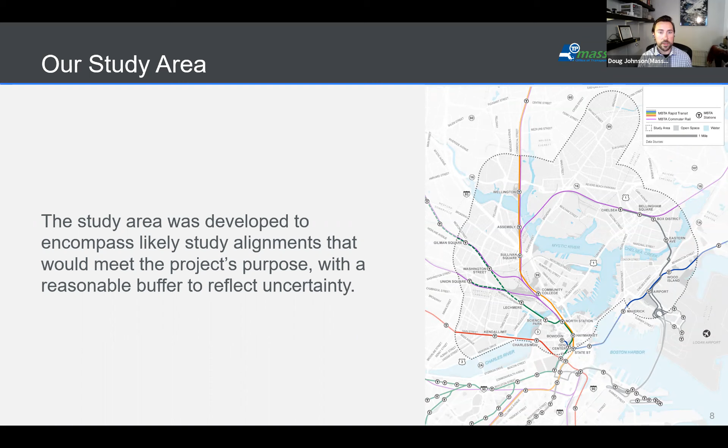Right now, we are developing our tier 2 alternatives. The goal is to finalize those by the end of September, beginning of October, and then take the next couple months to complete the analysis of those alternatives. The goal is to have the alternatives analysis complete by the end of this calendar year or beginning of next. Then we plan to have another stakeholder working group meeting sometime in winter 2022, followed by a third public meeting, and ideally the selection of a preferred alternative.

Between now and the end of December, we are going to meet with all of our municipal stakeholders several times. We've been meeting with many of you over the past couple months since our last stakeholder working group meeting, and those conversations will continue. In fact, we're meeting with some of you in the next couple weeks before the public meeting on the 28th. So there will be many individual meetings with municipalities as we refine and work out the details of these alternatives.

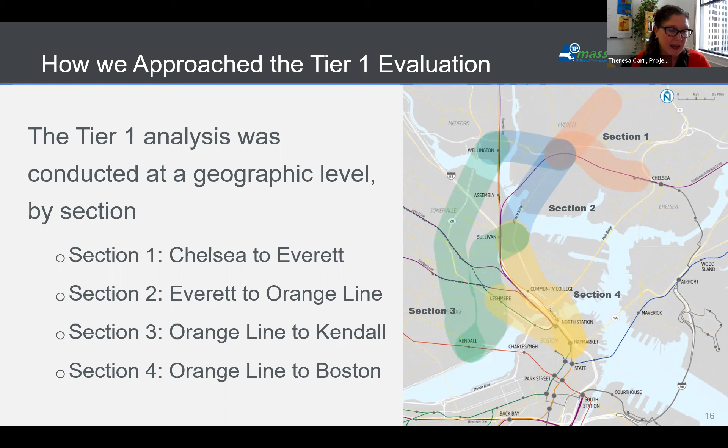So it is a lot of information. We've built in several minutes for discussion at the end of this part of the presentation.

So first, starting with section 1, which starts at Chelsea Station and largely ends at Sweetser Circle with one exception. We explored 7 different concepts. Many of these explore the commuter rail right of way. We have some that are routing onto Route 16, others along 2nd Street to serve Everett Square, and one concept, as Doug referenced earlier, that originates at Glendale Square and operates along Upper Broadway.

Now, concept 1D stands out in how it operates on street to the extent possible, so it gets a lot of visibility for that reason. You're on street as opposed to the commuter rail, which is kind of in back of some of the land uses that we're hoping to attract ridership from. But also, it serves Everett Square. Now, that was something that we really found as being important from this tier 1 analysis—that serving Everett Square is a really important thing to do.

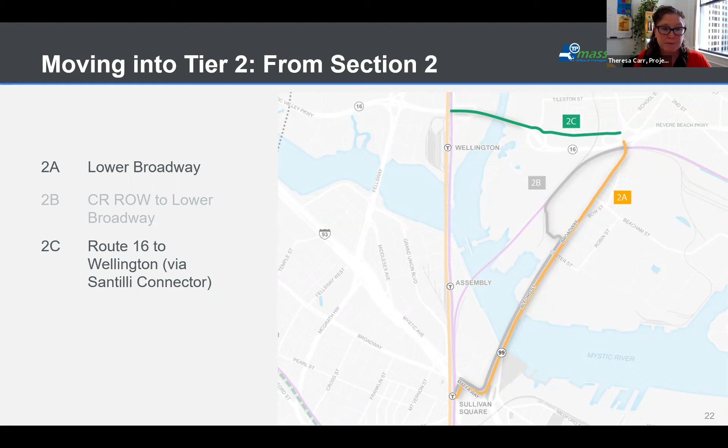So moving into section 3. Section 3, we looked at a bunch of concepts. The main corridors were Inner Belt Road, Fellsway, McGrath, along Washington to McGrath, along Rutherford Avenue over the Gilmore Bridge, all using some variation of First Street or Land Boulevard to Binney into Kendall.

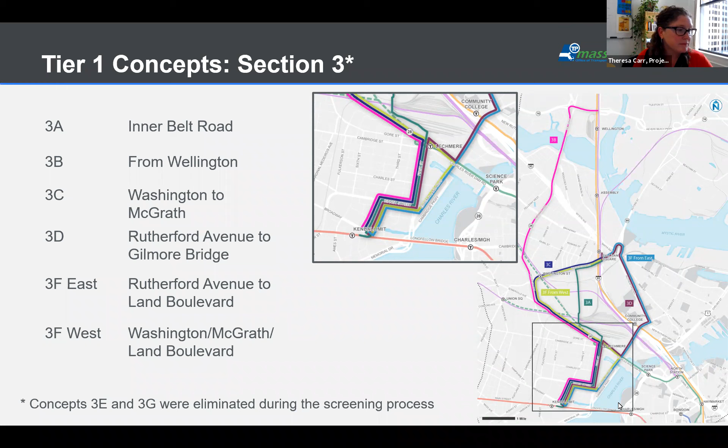Thanks, Theresa. Our consultant team looked at the bridge that had been proposed back in 2013 or earlier for Inner Belt Road, from Inner Belt Road into North Point in Cambridge. And they found that that bridge had a conflict with the yard lead ramp from the Green Line extension.

Right now, what you see there is existing. You can see that there's a small conflict, but the bridge that had been previously proposed, if it were to be built at that elevation, would preclude the possibility of that future connection into the Green Line maintenance facility.

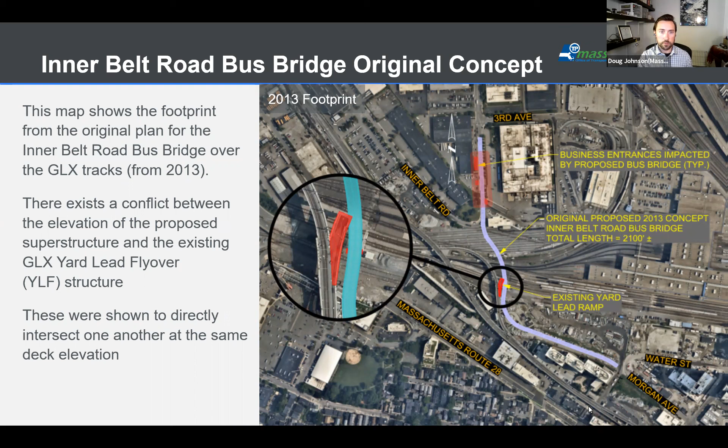So our project team looked at what it would take to elevate that bridge so as not to preclude that connection in the future. Our structural engineering subconsultants took a look at this, created a model of this bridge, and they found that you could build this bridge high enough to clear that ramp and not have a conflict with the existing spur or a future ramp.

However, by raising that bridge that high, you have to make the structure longer. You kick out the approaches, namely to the north along Inner Belt Road. So with the bridge that had been previously proposed, there were going to be some impacts on Inner Belt Road to the right-of-way and the businesses along that stretch.

But with this bridge, those conflicts would be extended further up Inner Belt Road past 3rd Ave.

So technically, while you would be able to overcome these issues, due to the anticipated effort needed to do so, as well as the other anticipated impacts associated with building the bridge, plus the presence of a less impactful alternative route, namely Washington Street to McGrath, the team has decided not to move this alignment forward for further consideration in this study.

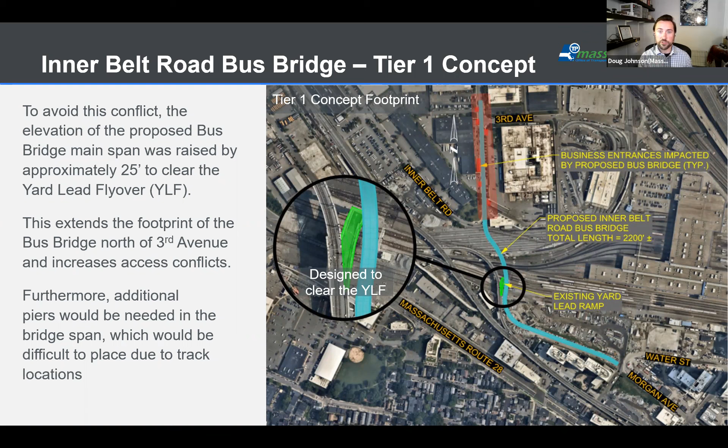But because of the potential conflicts and effort that we believe it would take to overcome those conflicts and those issues, we've decided not to advance this into tier 2. Back to you, Theresa.

Concept 3C, which operates along Washington to McGrath, we feel shows a lot of promise. Operating between Wellington to Kendall along Route 28 is something we'd like to explore a little bit more. We've also had a couple of conversations with the city of Cambridge.

We just, in the technical team, have some uncertainty about what right of way we can assume is available for transit priority. So we are keeping both an alignment that would go down First Street and an alignment that would go down Land Boulevard on the table for a little while longer.

Similarly, between 3B and 3C, they share an alignment south of where Washington Street meets McGrath. So the difference between these two is really Route 28 north of Washington Street. In tier 2, we're really going to be exploring the impacts and benefits of those differences.

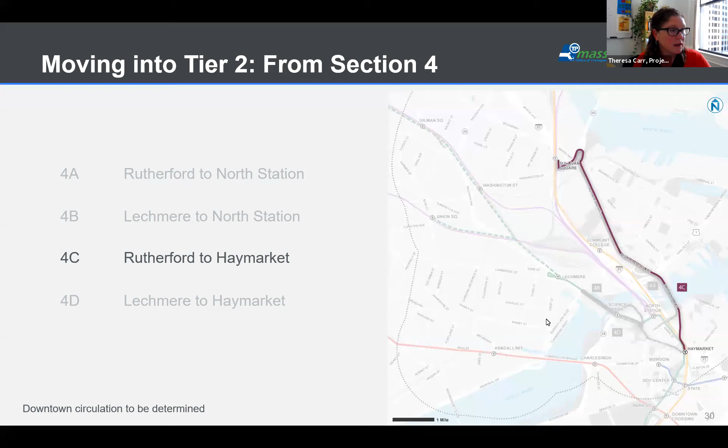And here we'd really like to start having a discussion. We have a few minutes set aside for discussion. These findings are still draft. Doug mentioned we are preparing some documentation about methodology, data, and findings, and we'd be happy to sit down with anyone interested and go over it in more detail. But we'd love to take a couple minutes to go through with you what we've done so far. Do you think this process missed anything? Are you surprised by your findings? Is there anything you think we should have looked at differently?

And let's start with Jay. Thanks, Theresa. So I have 3 or 4 questions, but I'll start with the most general one, which has to do with the scoring system. And I apologize, I did step out for a minute when you started, so you may have covered this already. But I'm trying to understand, how are we weighting these different

categories, climate resiliency, mobility, access, safety, and so on. And I guess I'd like to see more detail about why a certain alignment scored poorly on one versus another. So if it didn't score well for climate resiliency, why was that? And how do we recognize if it scores poorly in one area, but the solution to that makes the project score poorly in another? It starts to get very complicated.

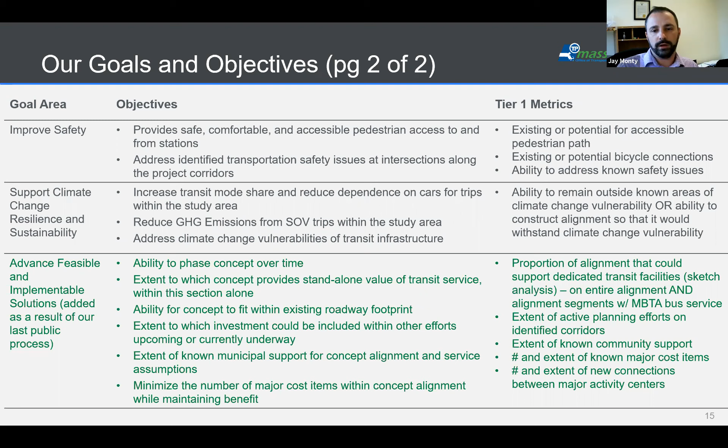That was my first question. Thank you. The next question was in relation to the commuter rail corridor options. I sort of got the sense that there was this desire to not depend on the commuter rail, as if that was an advantage somehow. I wanted to clarify that and understand, is that the case?

Yeah, no, what we found is actually 1D. So commuter rail shows up in sections 1 and section 2. And so in section 1D, we actually saw it showing the most promise. This does rely on a section of the commuter rail right of way between the current terminus and 2nd Street. We just wanted to give ourselves the option, if we move this process forward, in case we found something in conceptual design that would make it difficult.

We know that this is a constrained area, so we wanted the ability to look at a different alternative. But no, I mean, you can look at 1B and 1D, they perform similar, but we really liked a lot about 1D. And that was a little bit different in section 2, just because, as I mentioned, staying on street attracts a lot of visibility.

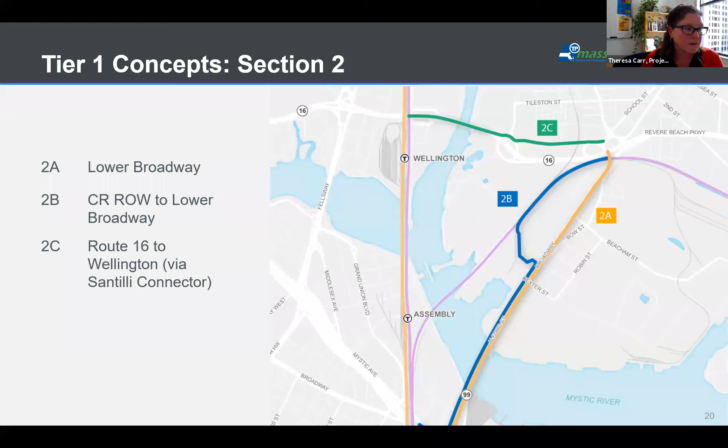We think there would be a lot of benefits from staying on street in this section. We also had some implementation concerns just in how you bring the concept back onto Lower Broadway from the commuter rail right of way. So that actually had an effect on 2B's performance.

Yeah, and I see Suzanne made a comment, I think it speaks to this a little bit too, which is, when we say an implementable solution, does that mean technical feasibility? I think you get to this issue of, when something looks hard, do we avoid it? And I think the answer for us is no, we don't necessarily avoid it if it serves mobility and access and equity. That's an important point I want to make on behalf of Everett, that just because it's difficult doesn't mean it's not worth it.

And so I hope we're not looking at something like the commuter rail right of way in that section between 2nd and 3rd Street and saying, it's hard, so we'll just not do it. I think we need to take a harder look and say, is it what produces the better mobility and equity result?

Agreed. And I think when we get into the next part of the presentation, we will go through a couple of our design assumptions in that specific section as well. Great. Yeah, and if I could just jump in here, Theresa, could you go back to the slide that shows all of the alignments for section 1?

So we found in our evaluation for these, I just want to clarify it because I think the existence of 1B coming out of the tier 1 evaluation may give a false impression. 1B is there as we continue to evaluate the commuter rail right of way, just in case we run into an obstacle or condition that precludes the extension of a busway along the commuter rail right of way.

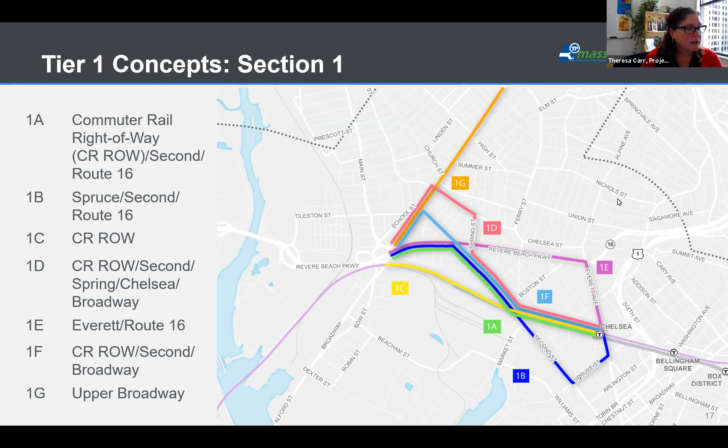Can you just switch to that slide real quick? Sorry, the tier 2. Let me fast forward to it. We're going to show it again, we're going to go through it in a lot more detail. Here we go, well, here's one that shows it.

So we have one going into downtown, sorry, one into downtown, and I guess two going into Kendall. But I guess before we go into the tier 2 piece, can we go to Vineet?

You're on mute. It's like maybe your microphone isn't working. It's showing you're unmuted, but it's not showing a connection. Maybe we could go over to Ali and then back to Vineet.

Sure, Vineet, you can also type your question into the chat box if you'd like. So, Ali.

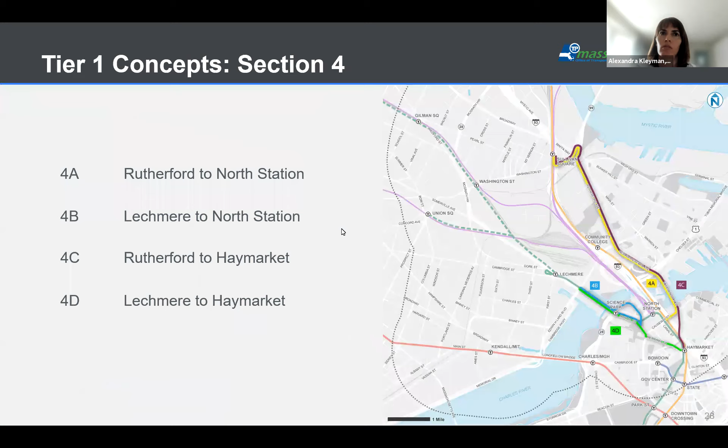So maybe I missed this, but are ridership projections more part of tier 2, the tier 2 analysis, or? That's a really good question. So we looked at the market in tier 1, and actual ridership projections are part of tier 2. That's an example of where when we get down to a smaller set of alternatives, we can do more detailed analysis, and ridership is a perfect example.

So these are all proxies for ridership, right? We're looking at employment, we're looking at total trips, transfer opportunities, the work that Bus Network Redesign has done in terms of high priority corridors, and the number of affordable housing units within a half mile of the alignment itself. So those are all proxies, but we didn't do specific ridership projections for tier 1.

CTPS will be doing ridership modeling for us for tier 2 once we've developed service models for any of the alternatives and estimated run times, things like that. Once we provide that information to CTPS, they'll be able to model ridership.

Great. Try Vineet again. Hi, can you hear me now?

Yes. Very quickly, I just wanted to support the great comments that Suzanne and Jay made, relative to first, we really need to know how the evaluation was done. Doug, you said you'll share the more detailed document, but it does kind of get abstracted too quickly without really understanding the pros and cons. And second, I think Jay said this, is there some sense of prioritization or weighting of the different alternatives? And maybe you answered that, if you did, that's fine, but we'll have to look at that as well.

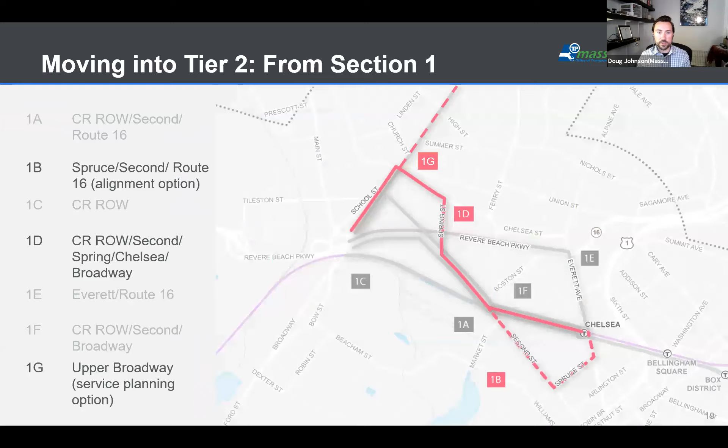Yes, and to your point about it being a little too abstract, I totally understand where you're coming from, and same for Suzanne and for Jay. So we'll provide the documentation for how we did all of this. And I guess it sounds like there's a lot of interest in meeting to discuss how we actually scored these the way that we did. So I think it will make sense to preemptively schedule an optional working group meeting for everyone, maybe two weeks from now, where folks on the stakeholder working group can just attend.

And that will be the one subject we cover at that meeting. And then the Gilmore Bridge piece - yes, that section. So to your question about weighting these objectives, we didn't have a formal process for weighting any of these metrics over others. Within each goal area, there was no weighting. That segment we evaluated as Sullivan Square to Lechmere, and it scored poorly for a few different reasons. I think Theresa, you can go to that slide.

And I'd be interested to hear from Cambridge, particularly what their thinking is relative to that connection as well. So yeah, the sections that used Sullivan and then went over that bridge - they didn't necessarily score badly in our criteria, they just didn't score as well as the other segments we had identified. I should note that the alignment from Sullivan Square to Lechmere used Rutherford and then went over the bridge.

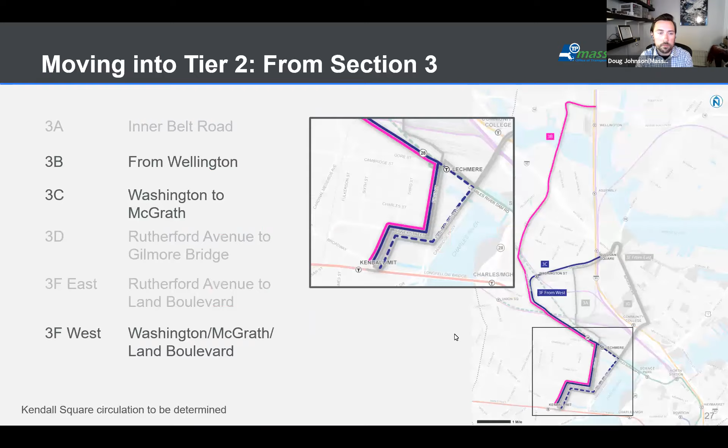Okay, thank you, yeah. Appreciate it. Yep, okay, we really need to do a time check. Doug, we're at 3:10. I think we can probably move forward unless - Jay, did we get to your other questions, or do you mind holding them until later? I can wait till later. No worries, okay. Let's get into tier 2 and talk about what that process is going to look like, because I honestly think a lot of questions folks have will actually be answered by the second half of this presentation. All right.

So here's this graphic again, and we want to highlight what's coming next. So tier 2 is engaging CTPS, as Doug mentioned, to run our ridership and air quality analysis on up to 5 alternatives. This month we're having a lot of one-on-one conversations around design assumptions and service planning. So that is the work that's coming up this month.

So here are our metrics - we kind of went through this as well. There is a difference between the tier 1 and the tier 2 metrics. We are getting into a lot more detail in the tier 2 process. Same goals, same objectives.

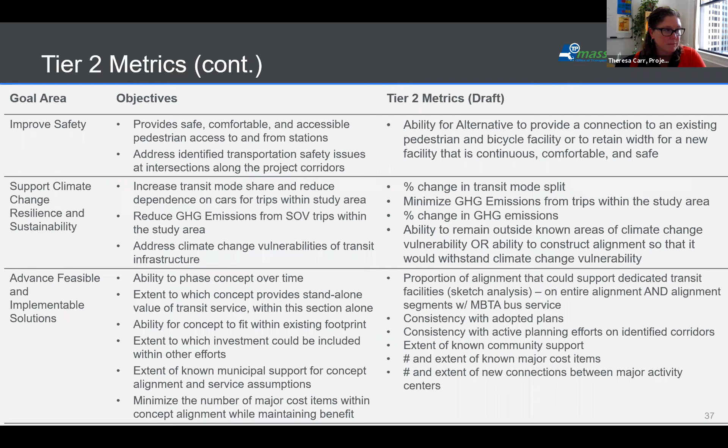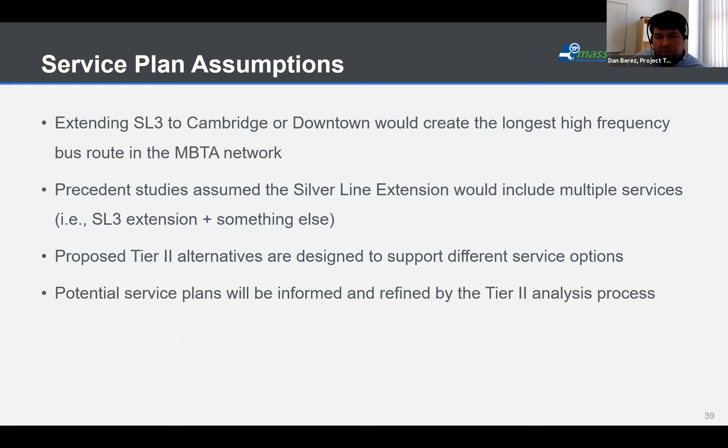As part of the tier 2 development process, we're going to be looking at service plans for the draft alignments and some underlying assumptions of those service plans. One thing we recognize is that extending SL3 to Cambridge or downtown would create a very long high-frequency bus route, and precedent studies have assumed that the Silver Line extension would include multiple services. The Lower Mystic Working Group assumed potential for two services. So as we go through this process, we will look at opportunities that might include an SL3 extension and something else. The draft alternatives themselves are designed to support different service options, and there'll be some iteration as we move into tier 2 about what that service plan actually looks like.

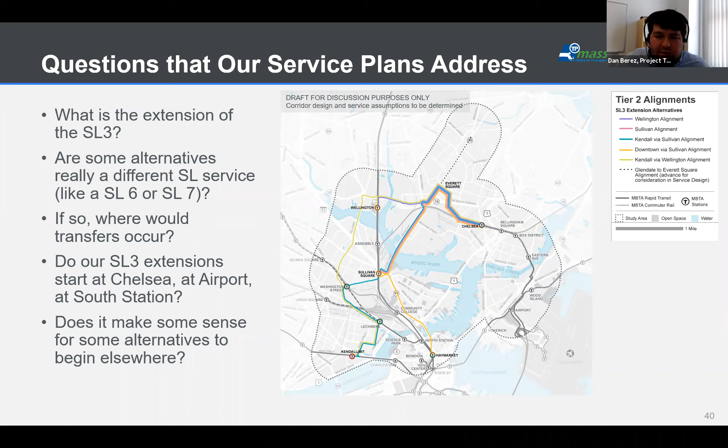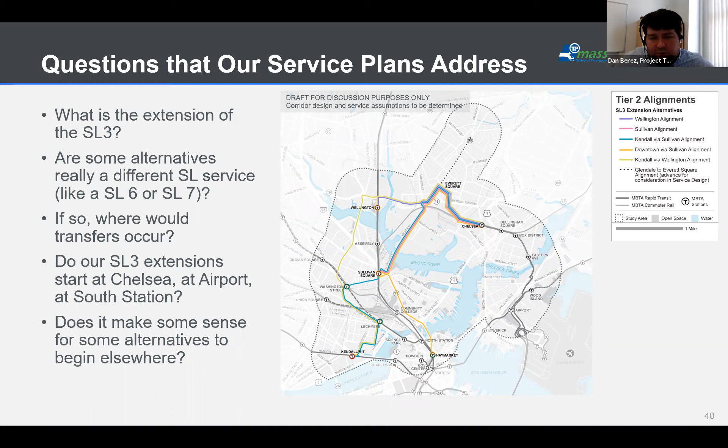The critical questions are: what is an extension of SL3? Is there potential for a different service to serve some of the alignment? And if so, where would those transfers, connection points, and starting points be? As Doug mentioned earlier, we are considering, for example, a Glendale Square starting point for a service, and this is part of the coordination with other efforts and understanding where Silver Line fits in, and how to develop a service plan for that alignment.

In terms of fleet assumptions, we'll be projecting fleet requirements for each tier 2 alternative, building travel times based on fall 2019 schedules and in-schedule speeds, and then adjusting those based on observed impacts from the assumed transit priority measures in each alternative, and working with T-service planning to make sure that our schedule designs underlying our fleet and resource requirements are consistent with their planning.

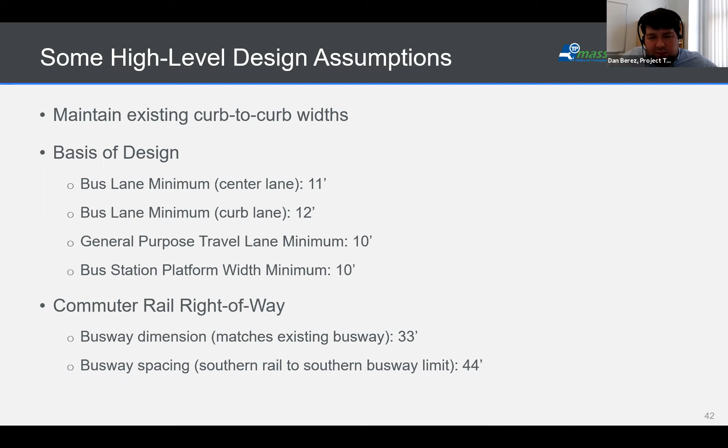In terms of design, we've also been working with MBTA and MassDOT staff to establish a basis of design for the project that will help guide the design assumptions that feed into the tier 2 process. This shows just some basic dimensions that we've developed in coordination with those teams.

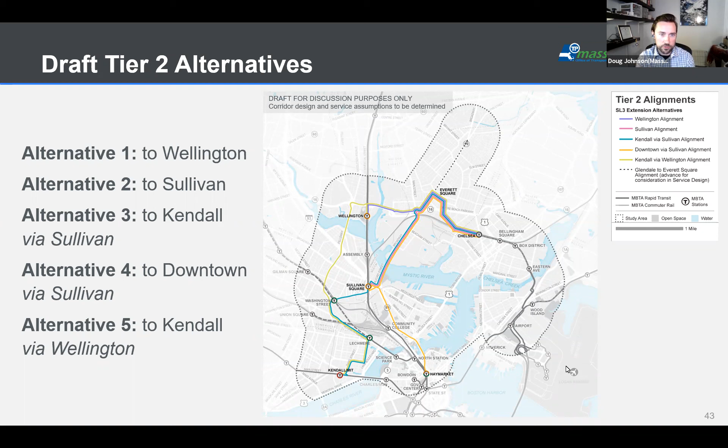Let's skip to the next slide that shows this. We were going to walk through one of these as an example. You can go two slides from here. All right, let's start with this as an example. I think Thaddeus is going to speak to this—he can jump in if there's anything I miss.

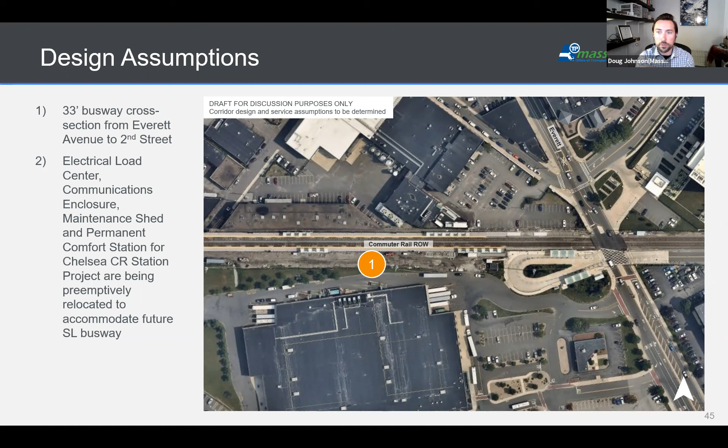For each one of these segments, we are looking at the existing conditions. We have right-of-way files for a lot of these segments; for others, we just have curb-to-curb width information, but we're trying to get as much right-of-way information as we possibly can. For every segment, we're figuring out what we could actually fit within the existing right-of-way, and if we needed to expand it, what the actual impacts would be.

Starting at the terminal of the SL3 in Chelsea, we are looking at how much space we would need along the commuter rail in order to fit an extension of the busway there. You can see how that fits in here. So we're looking at how much space we need, what the right-of-way impacts would be, or impacts to any properties along that corridor.

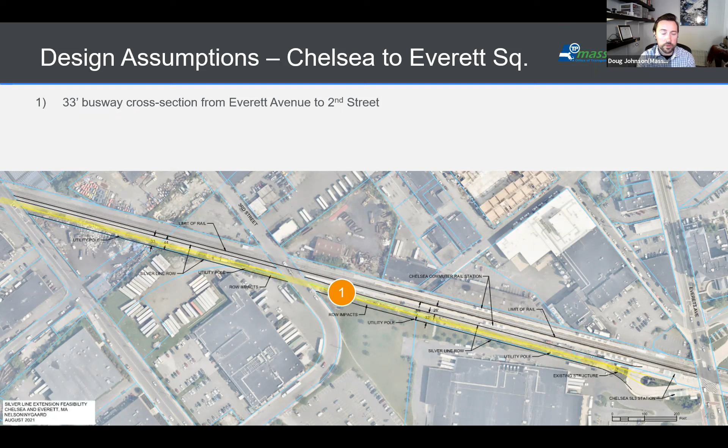Then, for any routes that switch to on-road, we are looking at what is available within the existing or potential future right-of-way. On 2nd Street in Everett, for instance, we have the existing curb-to-curb widths, but we know the city of Everett is working with developers along that corridor to modify the roadway as parcels get redeveloped.

So there are going to be some stretches on 2nd Street where the right-of-way will actually be wider in the future than it is now. So we want to take into consideration those future conditions and see where we can fit in transit accommodations.

We'd like to assume on the 2nd Street corridor that for the majority of the corridor, we would have the space for dedicated bus lanes from the commuter rail right-of-way up to Spring Street, where our alternative would turn off. We've had a lot of conversations with Jay about that. There may be some pinch points along the corridor, but through this process we will be working out what the right-of-way assumptions should be, where stop locations could be assumed to be, and where we would need new signals, where we could potentially have transit priority, things like that.

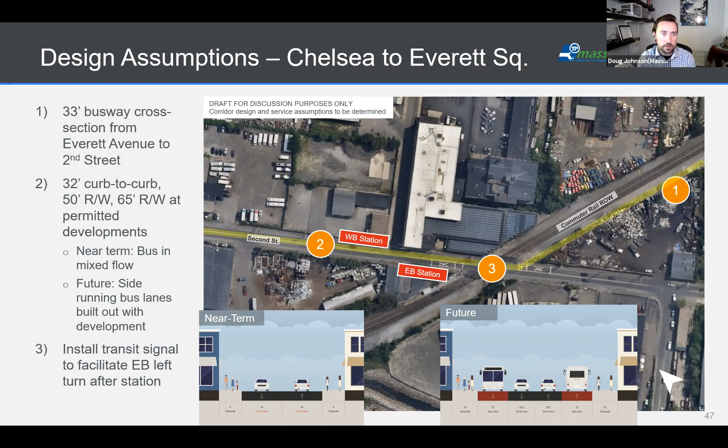So we continue that process here on 2nd Street, and for right now, all of the alignments are following this path, so that's why this is serving as the example.

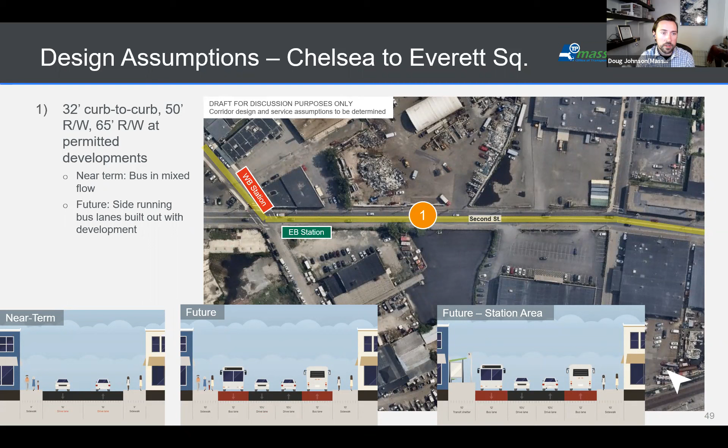But then when we get up to Spring Street, the right-of-way is much more constricted. Right now there's a travel lane in each direction on that stretch. We may have to assume that in our future condition along that stretch, we would be operating in mixed traffic.

There may be the potential for assuming a different condition. For instance, if through our conversations with Jay, he thinks that it would be viable to do something else along that corridor that isn't just mixed traffic. So there are going to be some alignments.

Every alignment is going to have a different type of transit accommodation depending on the conditions, but in every alignment we are attempting to identify the most transit accommodations we think we can possibly get, either in the existing right-of-way or what we think the future right-of-way will look like.

That's something that we're evaluating all the corridors based on, and that's something that we need to do in order to get further into the tier 2 analysis to actually figure out how long it would take any of these services to traverse these corridors.

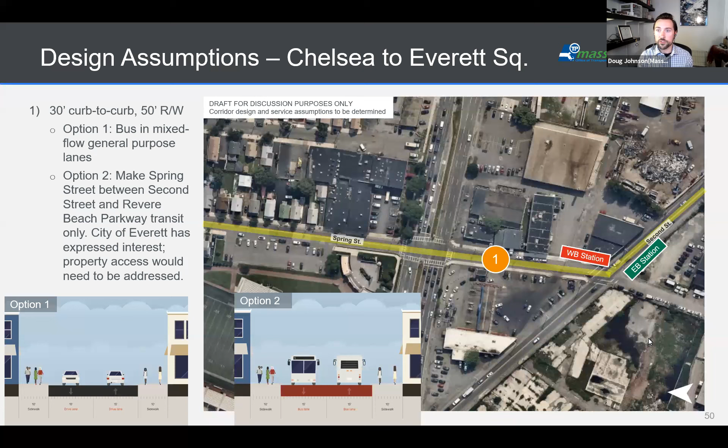But we wanted to run through that example so that you saw sort of what this process looks like, and highlight the fact that because all of these alternatives operate on so many different roadways of varying widths, the accommodations that we assume the service would have will need to vary depending on the conditions.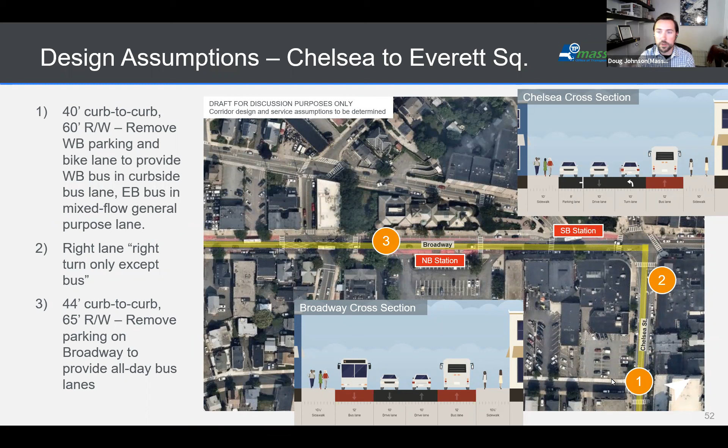And then the rest of this was just walking through one by one the different alternatives that we had drafted. The first was the Chelsea Terminal to Wellington. The second is the Chelsea Terminal to Sullivan.

So we're talking to the city of Everett about Broadway and what we can assume would be out there in the future as development along that corridor proceeds, because we know that not all corridors are going to be the same in the future as they are today. But these are conversations that we need to have.

Same thing for both McGrath and Rutherford Ave. There are other processes underway that are looking at those corridors, so it's important for us to talk to those project teams about what we can assume the future conditions could look like for a service that would be operating on that corridor.

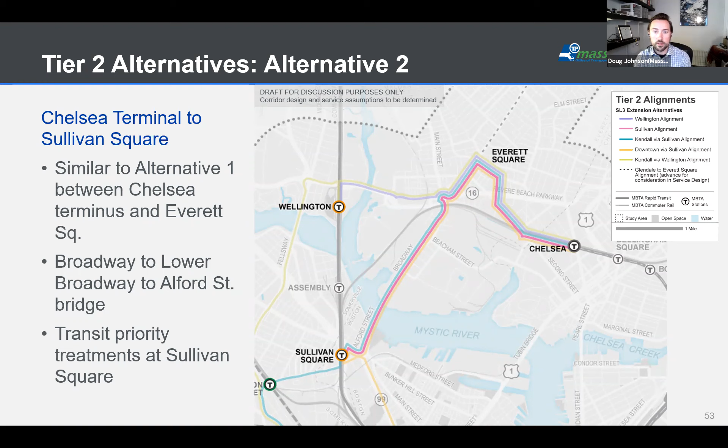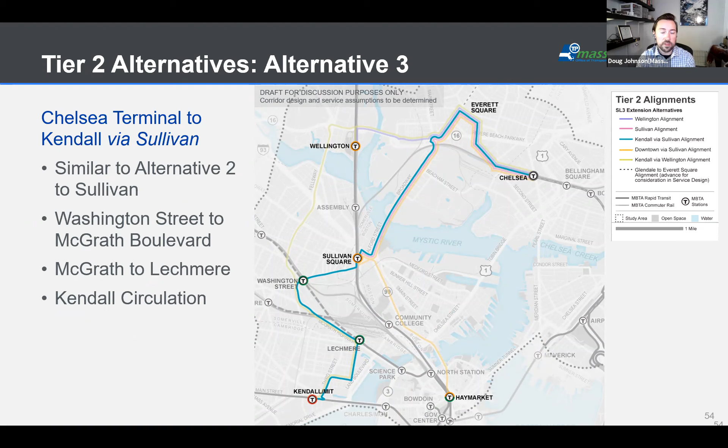But otherwise, yeah, the rest of the alternatives that we had identified were the connection from the terminal of the SL3 to Kendall Square by way of Sullivan, using Washington and McGrath. And then I think the next one shows it going downtown.

So for this one, a really important conversation that we'll need to have with the project team for Sullivan Square and Rutherford is to understand the signal timing and signal cycles in a future Sullivan Square, so that we can estimate how long it would take any bus service to get through the new intersections that would be there to get into the Sullivan Square busway.

So we need to understand how long it would take to get into Sullivan Station, and whether it makes sense to make that connection with an alternative, or assume that an alternative is bypassing the station and just continuing down Rutherford. These are questions that we haven't addressed yet. We haven't answered these because we need to work out these details in order to understand exactly what we should or would be modeling for any of these alternatives.

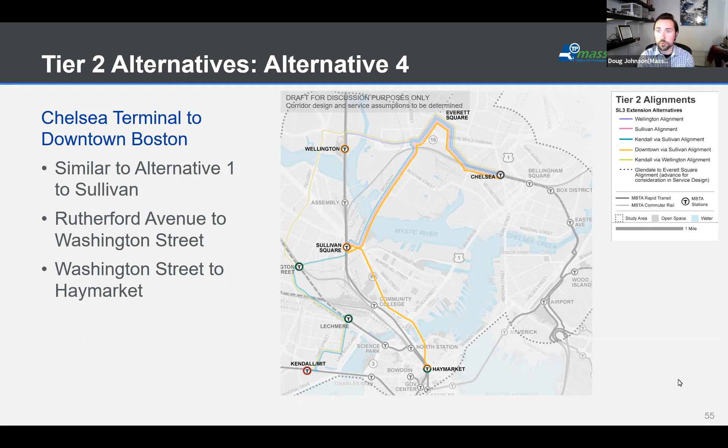And then, lastly, alternative 5 was to make a connection to Kendall Square by way of Wellington.

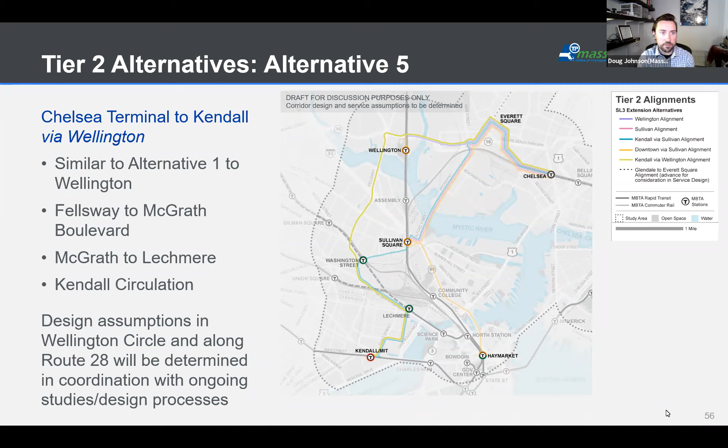After that, we have 10 minutes left. I think there's probably still a lot of unanswered questions we want to get to. We had some prompts here, which may not be necessary at this point, because I'm sure folks still have questions. So let's take the last 10 minutes to open this back up to stakeholder working group members and get feedback from folks.

Vineet? Just very quickly, in the discussion of trade-offs, in addition to parking and the need to take travel lanes, we should also talk about bike accommodations, that there may sometimes be a choice between the two, and that can create its own tensions. So it might be useful to acknowledge that as an issue. I think that's one of the biggest challenges we're facing in Boston, for example.

Thank you, that's a very good point. We do have that reflected in our objectives, and for each of these corridors we are evaluating what would be possible. Matt Moran actually passed that comment on, so thank you, Matt and Vineet. Appreciate it.

Jay? Yeah, so on your questions I've left -- we talked about Glendale Square a little bit, and I know you and I have talked about this a couple of times, that maybe it's Silver Line, maybe it's not, but at the end of the day it will be some sort of quality transit connection coming from Glendale Square south.

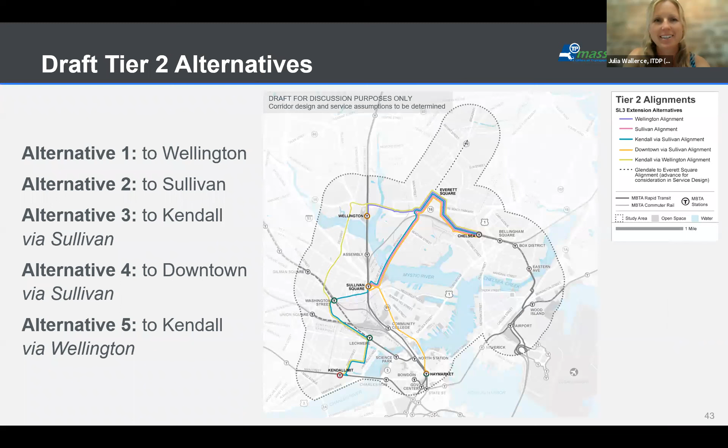Did you have a question that we can answer? Oh, I just wanted to reference, it's hard to remember since I don't have these with me. I just wanted to reference again.

I should note that we will share this presentation with folks. It's also going to be posted on the project website along with the recording of this meeting. I'll state again that we will send out the methodology memo for the tier one analysis, and I'll schedule a meeting for stakeholder working group members to discuss that analysis in more detail. I'll try to find a time in the next couple of weeks to do that with everybody.

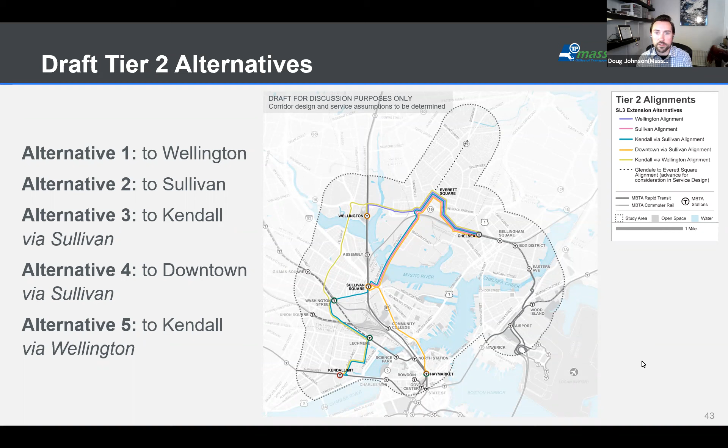I have a quick question, actually. Please, no one else has their hand raised. I know you mentioned at the beginning that the map we see here, or that we'll see in the final report, might look different from the network redesign map that's going to be released later this fall, or even just a high frequency corridor map, which is not route specific. Can you reiterate exactly what that process is? Say the SL3 alternative shows Rutherford as a preferred alternative, but network redesign shows Main Street. How do the two plans speak to each other and arrive at a solution? What is the process for that?

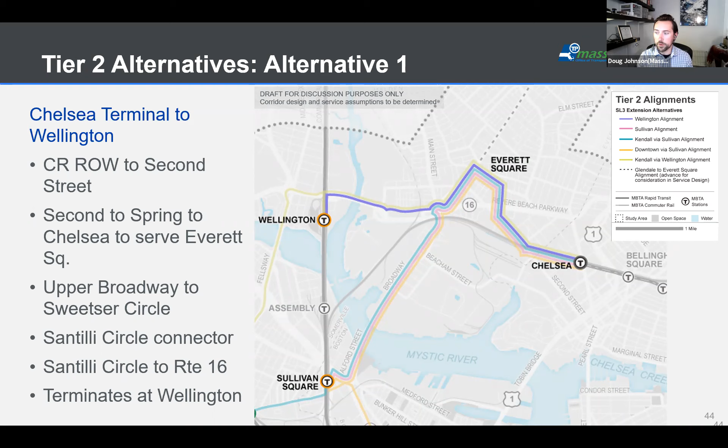That is a really good question. It is an ongoing discussion between the project teams. When we started our process, bus network redesign hadn't gotten as far along as it is now, and now it's sort of overtaken us, I would say. So we are continuing to coordinate with that team as we develop the alternatives. We're not going to develop or finalize our alternatives and advance them into the next stage of analysis without meeting with the BNRD team several times. I can't say exactly how the processes will reconcile any differences in the next few months. We need to continue on our process and see how bus network redesign continues forward, and then address any discrepancies that may arise. It's essentially an iterative process that's still underway. Right now it's basically a matter of continued coordination between these two processes.

Exactly. Ali sent a message in the chat that is only visible by hosts and panelists, so I want to read it out loud for folks. Great point, Jay. It's a huge issue for Somerville as well, being able to assure developers that quality transit service is coming so we can get the parking numbers down. Also getting developers to contribute to these transit projects as impact mitigation. That is something we've heard from many of our municipal stakeholders, especially Jay and others. We absolutely hear that and understand the need to. Yep, same from Boston, that makes sense. Thanks, Vinny. We understand the position you are in, working with developers who are trying to accommodate a future condition or respond to the condition you want to exist when those developments come online.

We're just over time, so I'm going to go through next steps unless there are any other questions. I know some folks probably have to jump off to other calls, so for those watching the recording, I'll go quickly through next steps. We have an online feedback form live on the project website, mbta.com/slx. We're asking folks to give us input. That form is available in English, Spanish, and Portuguese. We're hoping folks can weigh in on this process and give us feedback as we continue to refine and develop our alternatives. We have a public meeting coming up for this study at the end of September, on September 28th. The tier 2 analysis we've been talking about will be conducted this fall after we have refined and finalized all of our alternatives.